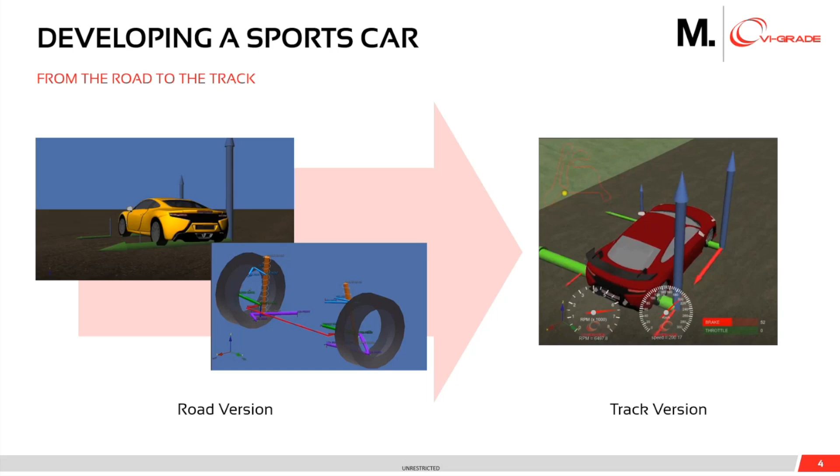In this webinar, we're going to be covering more the methodology and mentality behind this development. If you're looking for more specific details on how to use and operate VI-CarRealTime, we're also developing a video series together with VI Grade with that purpose. If you go on YouTube, you can very easily find that if you type VI Grade tutorials, or once again, you can find that information in our QR code. I think you'll really enjoy learning how to operate and use the software.

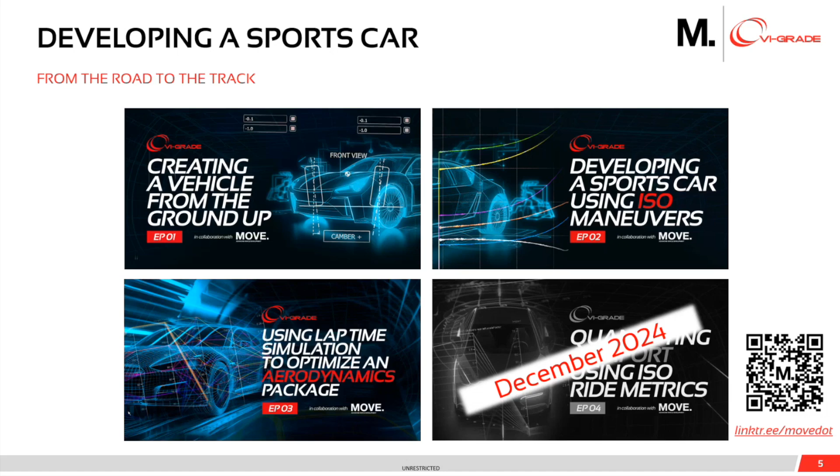All right, so a few quick words about the traditional development that we do not want to use, followed by a comparison with the digital twin-based development. In the traditional development, we would have the baseline vehicle that is our reference. We would define new targets for this vehicle, and then we would start prototyping new components to try and achieve our intended goals. The problem is we're going to have to prototype these parts, or actually do the tooling to manufacture these parts, then fabricate these components, go to the track, and then test it.

The problem is when we get to the track, we'll not achieve what we wanted. Maybe we needed more mass reduction. Maybe we needed more power. Maybe we needed a different damping setting, aerodynamics package, and so on. So proving ground testing, even though it is important at the end of the process, is very time consuming and very expensive.

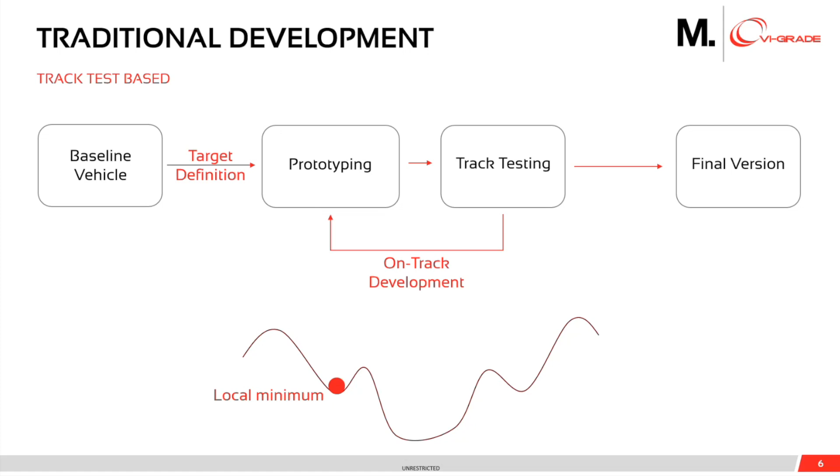Not only that, since we have a limited number of iterations that we can do when we're doing track testing and component prototyping, we risk getting only to a local minimum of our solution. So we risk not achieving all of the goals that that specific platform was capable of achieving. So it is limiting us.

And this is a very interesting plot that you might be familiar with. If you're not, I recommend that you take a look. There is a very interesting paper regarding this from Mandar Hazare, called An Integrated Systems Engineering Methodology for Design of Vehicle Handling Dynamics, in which we're going to analyze the different phases of the project, so concept definition, design, prototype, and then testing.

And we're going to see that if our approach is purely empirical and development on the track, project maturity takes a long time to come up. Why? Because when you are designing something, if you pass quickly through that and you don't do any proper work in the virtual environment using digital twins, you only know if you're getting to the final specification of your vehicle when you're really testing it. So it takes a long time until you get to the track testing and development to increase your project maturity.

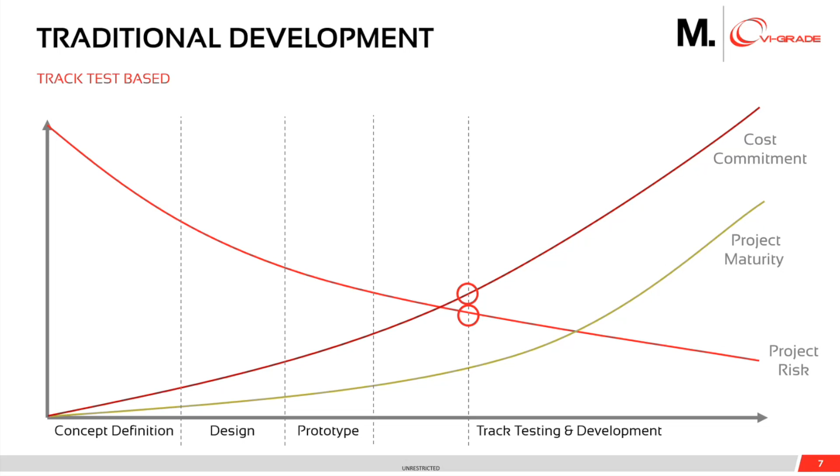On the other hand, cost commitment is very high because from the beginning, you're already testing things on track, having to do a bunch of tooling, having to manufacture many different prototypes. And actually, one of the biggest downsides is that the project risk is still very high while you already have a lot of cost commitment. So you already invest a lot of money into the project, but the project risk didn't decrease. You are still at the risk of the project failing, or not achieving your metrics, or the customer not being satisfied, or having to recall your vehicles that are on the road.

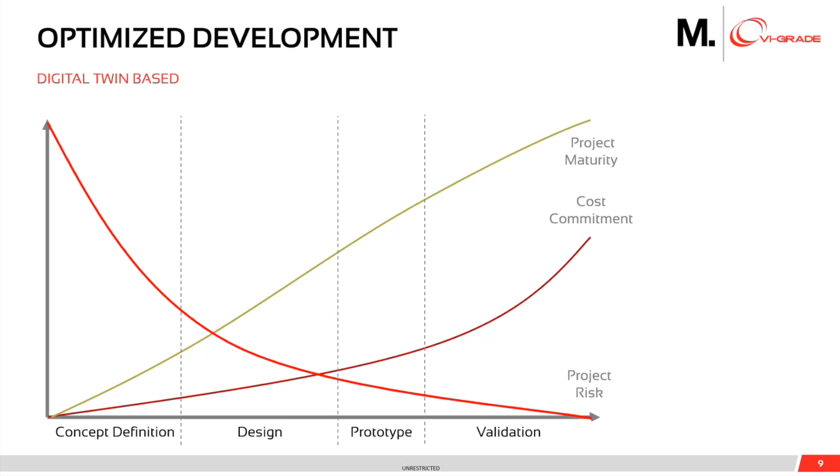So as we're doing proper work with digital twins, we get closer to the final project. We know that we're meeting most of our criteria. And then on top of that, if we also use driver-in-the-loop simulators, hardware-in-the-loop simulators, once again, the project risk is coming down a lot sooner. So we have a lot less money invested, but we already have a lot less risk as well, which is something very good for us as an OEM.

All right, so what will be the roadmap of our development together? We are working with a baseline or reference vehicle, and we're going to define new targets or new vehicle attributes, meaning the final behavior of the vehicle. Something that we have to keep in mind is that even though here we are speaking about creating a track-focused version out of a sports car, the methodology and all of our discussion is also useful and valid for many other examples, because very often we don't start from scratch, we start from a reference. Ideally an internal reference, or many times benchmarks that we perform, but we have that reference.

And then we are going to define new vehicle targets for our next iteration of the vehicle. And we're going to discuss defining these vehicle attribute targets. So once we have that, we're going to start with our offline virtual development, meaning we're going to be running simulations on our computer, and we're going to be using VI-CarRealTime for that.

After that, the next step would be for us to incorporate the feedback of a human being, meaning driver in the loop simulator, and also the effect of the real hardware, because we're not always capable of modeling all of the details of the hardware. So we also utilize hardware in the loop simulators, or the integrating simulators with hardware. Before then, we go to track validation and fine-tuning of the vehicle.

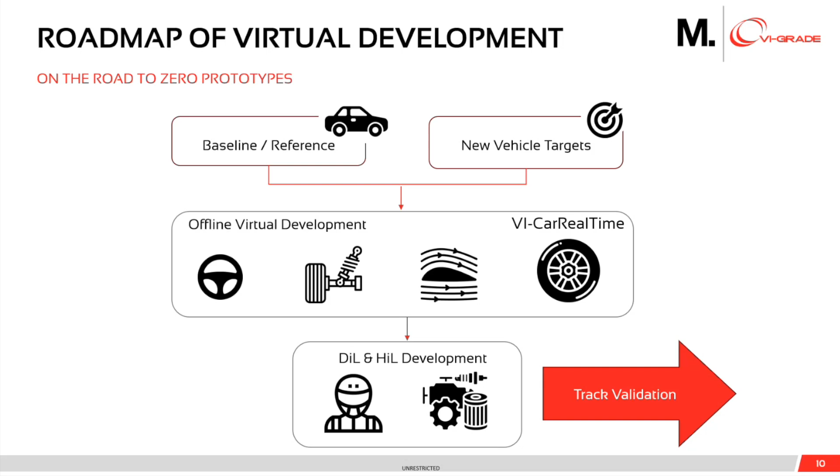So here, our case study, we're tackling the offline virtual development with a focus on VI-CarRealTime and showing you how the software can speed up your development. All right, so what is VI-CarRealTime? For those who are not familiar with the software, I don't like to call it a vehicle dynamics simulation software and so on. I like to call it a vehicle model environment.

Why environment? Because if you look on the right side of the image, we can do vehicle dynamics, so we can simulate all of the mechanical platform of that vehicle, which is obviously very important. But not only that, we can integrate control systems. And we know that nowadays, cars are as defined by the control systems and software as they are by the mechanical components. But even though it integrates all of these different areas, it is straightforward to model a vehicle because we use a curve-based parameterization.

So many times we don't have to have all of the details of the vehicle if we're able to measure the overall behavior of that car. For example, if we measure the suspension curves, we can directly input those suspension curves inside of the model, and we have already our suspension model. So it's very powerful to be able to work like that for fast digital prototyping.

Well, now when we look at the left side, this is also very important and explains why I like to call it a vehicle model environment. It is because it can very easily connect with driver in the loop, with hardware in the loop, with traffic simulation. If we use VI WorldSim, it provides us a very realistic scenario with other cars, other players in our environment. And with all of that environment, we start also looking at control systems, ADAS, driver feedback, interaction with other vehicles. So as we can see, it's a lot more than vehicle dynamics, even though we're going to be focused on vehicle dynamics in this particular webinar.

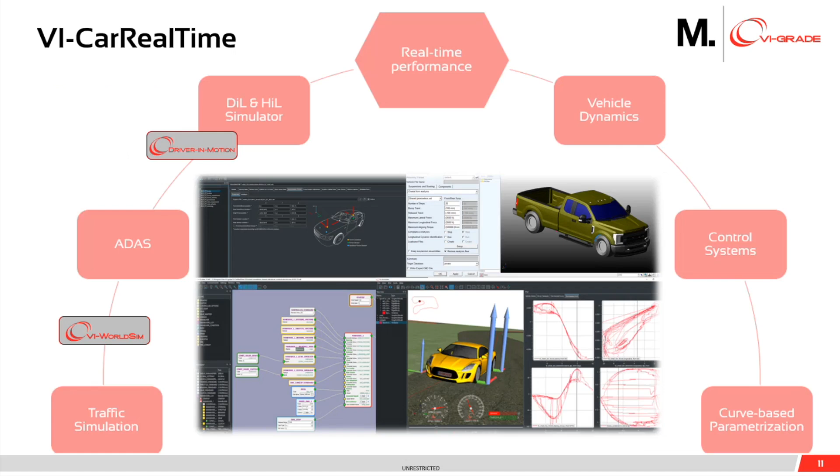All right, so now that we have the software defined, we're going to start defining the targets for our new vehicle. So where are these targets coming from? Well, one big source of information for us to define our targets is benchmarking. So we're going to be testing a bunch of vehicles in very specific and rigorous testing, because then we can collect what other people are doing, what compromises they are able to do, compare with our vehicles, and define future directions that we want to follow.

And of course, we're going to also be looking at the DNA of our brand, because basically defining the target is defining the DNA that we want for our vehicle, defining the personality of the vehicle that we're creating. So we also look internally and then compare it to the outside. Besides that, we're going to be looking at the voice of the customer, as we call it. So it doesn't only matter what we feel and what our test drivers feel. We're also going to be analyzing our customers, what they feel, what they want, and how we can connect what they say versus our objective vehicle attributes.

We can use simulations to understand all of the range, all of the performance envelope of our vehicles and digital twins. And one of the most important parts is not only collecting the data, but having a centralized database where we can put all of this information together and we can find relationships with them. So this is extremely important.

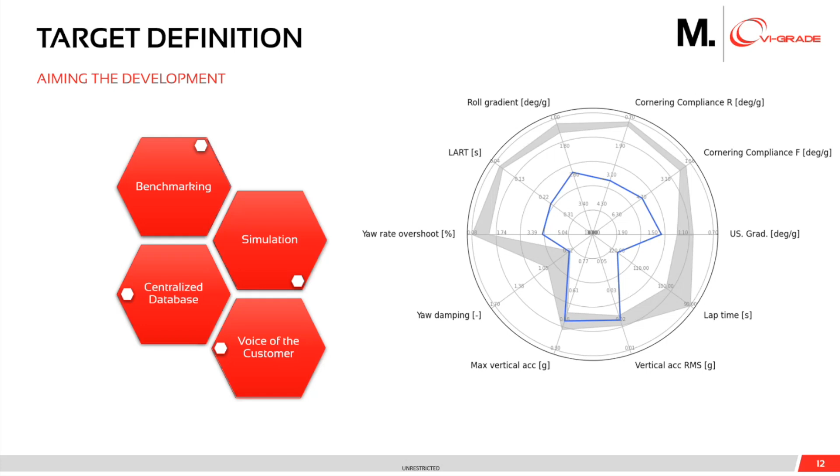So if you have a very rudimentary and not mature software solution and team, you should start with few metrics. Otherwise, once you have the maturity and the experience, you can start tackling more of these vehicle attributes so that you ensure that you always get to the fundamental ones, but in the correct way, in the way that you want them. So in this case, we are using VI-CarRealTime, and it's going to allow us to create hundreds of targets if we want. For this webinar, we selected maybe a dozen metrics. These are in the areas of steady state handling, transient handling, ride and comfort, as well as track performance.

So for this race car, even though we are trying to achieve a minimum lap time or a given lap time at a racetrack, it will be road legal, meaning that we still need to have the handling characteristics, the steering feel, the safety, the stability that a conventional sports car would have. So this is why it is important that we look at all of these metrics. However, when we are designing a real vehicle, not in a case study, we're also going to have a bunch of other attributes such as traction and braking performance, stability, energy management, particularly in hybrid and electric vehicles, torque vectoring, ADAS systems, and so on. So we're going to define a bunch of metrics, and VI-CarRealTime is helping us to define all of them.

So when we are working with simulation, not only can we work with many different metrics and targets that would be very hard to do in real life, to quantify all of that, to be consistent, and to have the time to do all of that testing. Not only that, it allows us to get more understanding. You're going to see that it is something that I will emphasize a lot in this presentation. It is not only the final result, but understanding what is going on. We don't want to press a button, optimize a system, and just have the final value, because number one, it will not be perfect, and number two, we're not going to understand why we have that. What we want instead is an understanding. We want to understand the connection and relationship between all of these different areas. I'll give you a few concrete examples in a few slides.

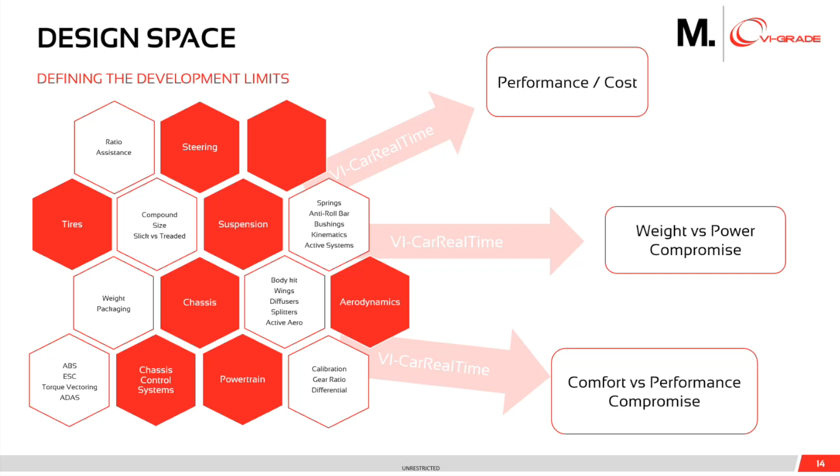All right, so we selected the components that we want to change. In this particular project, we found out that we are gonna have to develop a tire together with a tire manufacturer, which is something that we at MOVEdot do with our customers, and we interface the OEM with the tire manufacturer. We are going to change the vehicle mass, the power. We're going to develop new aerodynamics, so the bodywork will be completely different. We need to redo all of the CFD and aerodynamics work, and a few suspension components as well. So this is how we were able to minimize the cost for the performance we're going to get.

All right. So we are almost ready to start running simulations. Before that, we just need to make sure that we have our proper validated model, or ideally a digital twin. We know that to validate a system, ideally, we should start validating each of the components if we can. For example, tires, dampers, powertrain, and so on, before moving on to validating an entire system, for example, the entire suspension, where we could be using a K&C test, a K&C rig. Only then we go ahead and we validate the entire vehicle.

This is ideal because when we validate the final vehicle, of course, we're going to have discrepancies between the model and reality. But if we validated and tested each of the components, we can understand where this difference is coming from. So we can very quickly adjust our model to fix that. So it's a very good way to do that.

Not only that, it is very important to mention that the digital twin part should be taking place as a routine task. It is not something like, okay, we want to start a new project, so let's build our first digital twin before we can do that. Because whenever you have to tackle a project and you need to implement a new process on top of that, we know that it will not be efficient. Basically, you are creating two projects instead of just one.

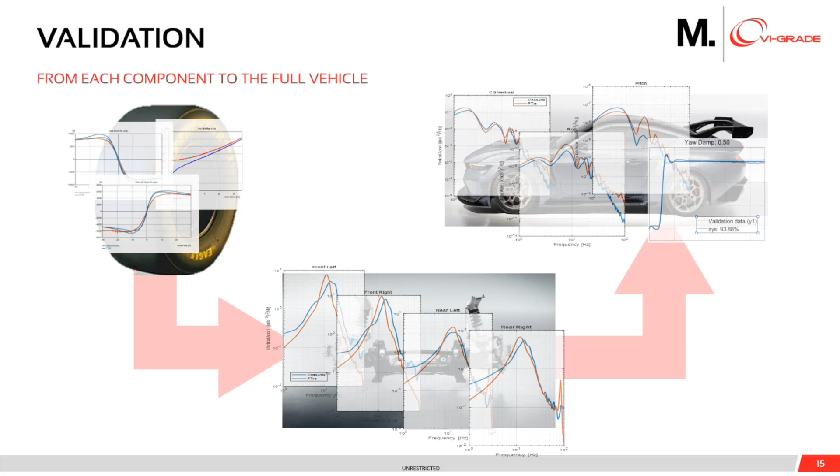We know that not everybody can instrument and test a bunch of different vehicles and take the time and the energy to create digital twins. So something very interesting is that VI-Grade did this together with IDIADA, where they provide digital twins ready to be used. If you scan this QR code, look on Google or use this link, you can see what fully validated digital twins they have available within VI-CarRealTime. So it is even easier when you already have a validated car that you can use as a benchmark or for any other analysis. So this, once again, increases efficiency.

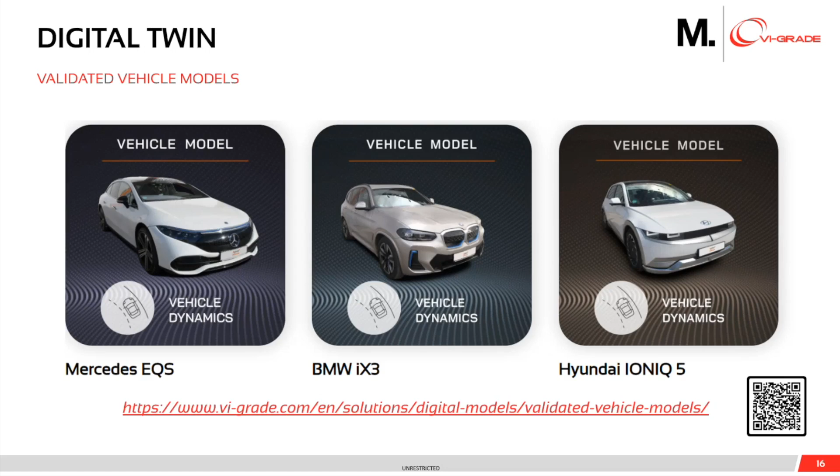All right, so let's say that we have our digital twin. Now we have to define what maneuvers we're going to be running.

It is extremely important that whatever maneuvers we are running in the digital environment, we are replicating the maneuvers that we do in the real world. Why is that so important? Basically because we want all of the results from these two sources to go through the same pipeline of data processing. So this is, once again, something that we very much focused on at MOVEdot, helping our customers come up with a streamlined and very efficient workflow of data processing.

So in this case, we want both our virtual test and real test to output similar data, to go through the exact same processing scripts, get the exact same metrics and sanity checks to validate the maneuvers. And then this helps us to get to actionable conclusions in a way that is a lot more straightforward.

Not only that, you can already see how this helps us get to that vision of having a vehicle development together with a digital twin development. Because whatever tasks we're doing with the real vehicle, we can quickly compare that with our digital version of it. So that's extremely important. I'm gonna highlight a few ways in which we can do that. In any case, we are now going to start tackling the simulations.

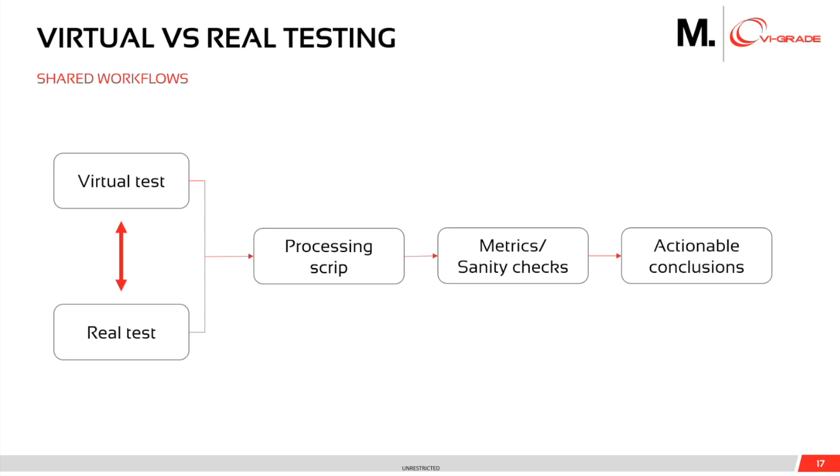So the first area that we wanted to discuss, as I mentioned, is handling, and we're going to be doing steady state first. So let's start simple. We're going to be running a typical maneuver, usually used from the ISO norm, which is a constant radius maneuver. In this case, because of space constraints in real life, we're going to be replicating the same maneuver in the simulation using the available space, in which we have a constant radius and we're slowly increasing the speed.

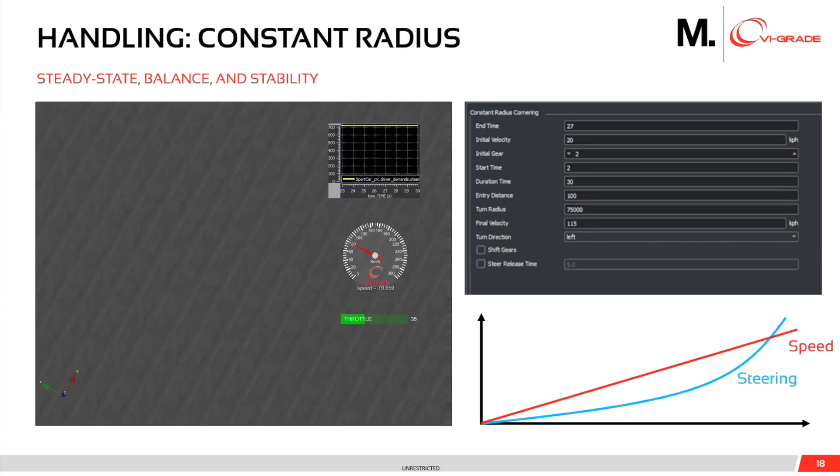Well, not that slowly, otherwise in real life we're going to be overheating our tires. So we replicate that in the digital world, and then we will be looking at how much the steering is increasing, or our side slip angle, our slip angles, roll angle, so we can extract a lot of metrics. The interesting part of doing this with VI-CarRealTime is that I don't have to set up that simulation. It is already parameterized for me. I just have to set a couple different numbers of what are the speeds, the radius, and so on, and then I'm ready to go. So it's very quick from the get-go to get these simulations running.

So the next step for us is to look at the results. In VI-CarRealTime, we already have an analysis environment, VI Animator, where we can see the plots and we can see the real vehicle, which helps a lot for troubleshooting and understanding the simulation results. But not only that, as you probably noticed, I like automations. I like automated processes. So the interesting thing is that VI-CarRealTime already provides me with an auto-generated report. As soon as I'm done with the simulation, I have this report generated automatically.

And the most interesting part is that the script for this report is available. So I can just modify it to do whatever I want: include new metrics, include new plots, and provide the plots that I want to analyze. So once again, emphasizing the need for automation. And with that, we were able to conduct our steady state vehicle dynamics analysis, going from the red curve all the way up to the targets that we define. As you can notice, the wider you go, the more similar to a race car or to a track-focused car we are in the way that we organize this radar plot.

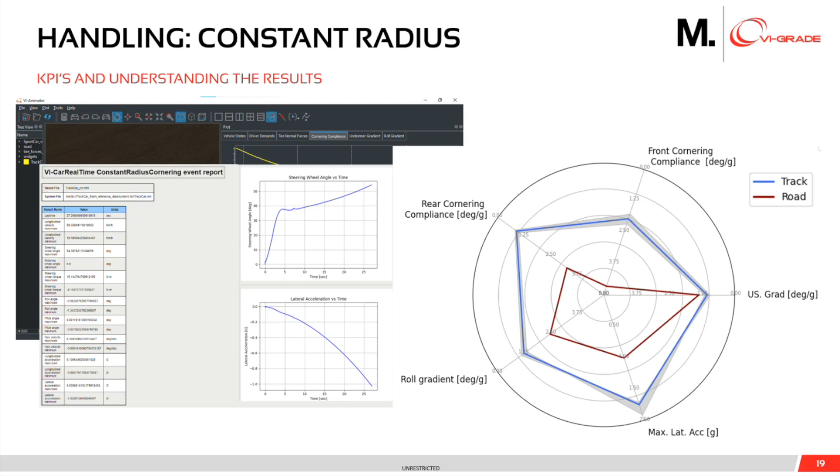So obviously, it's not as straightforward as you run one simulation and you're already achieving all of your targets. There are multiple sub-experiments that we're going to be doing, trying to understand the influence of each of the parameters and understanding what parameters we want to change. Always focused on gaining understanding of our system. And I'll give you some examples in the next slides.

Okay, so we were speaking about automation. Before we move on to the next maneuver, I would like to show you some other ways in which we can integrate Python within VI-CarRealTime. Whenever we're running simulations, let's say that there is an extra output that is not provided by the software. Let's say that I do vehicle dynamics and I look at cornering compliance of each axle, which is, by the way, a very useful metric, but I define it in a particular way, which is different from the way that VI-CarRealTime defines it. I can create a Python script for that, integrate it within the software, and then it's going to provide me with the results inside the software.

So I don't have to necessarily do post-processing totally outside the software. I can have that integrated. Not only that, but also, when I'm doing experimentations using investigation mode, which we'll talk about, I'm also able to create custom metrics with whatever processing methodologies I want using Python.

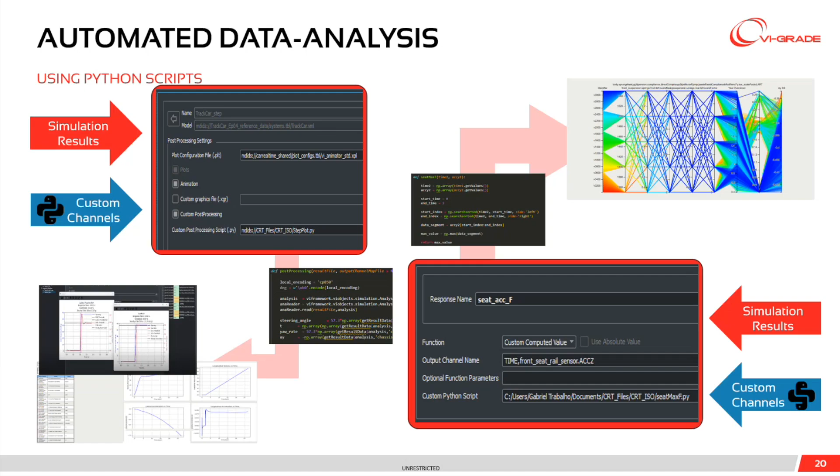All right, so we're going to be using that, and we will speak about the next maneuver. So once again, a predefined maneuver within CarRealTime, which is giving us the transient characteristics of the car. So this is a step steer. We are driving in a straight line, constant speed, and then we have a very aggressive steering input, as you can see. Since it's already parameterized, I just have to populate it with a couple of parameters that I want, and it will perform the maneuver for me.

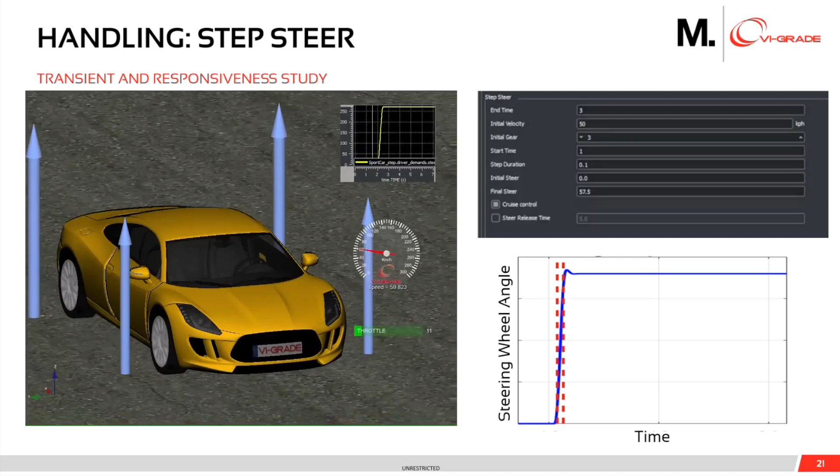Once again, I will then look at the results within the software, verify that everything was okay, have my custom plots and custom reports automatically generated, and with that, I can calculate, once again, automatically all of my metrics. What you can notice here is that this time, since now we're starting to look at transient, I was not able to achieve all of the metrics on the first shot.

And this is normal. We're not here to be perfect. We're here to do things efficiently and to gain understanding. So I don't want to spend months just running iterations to get this first maneuver right. The way I like to do it is to do one complete cycle of all of the different maneuvers that I'll have to optimize to gain understanding about my system,

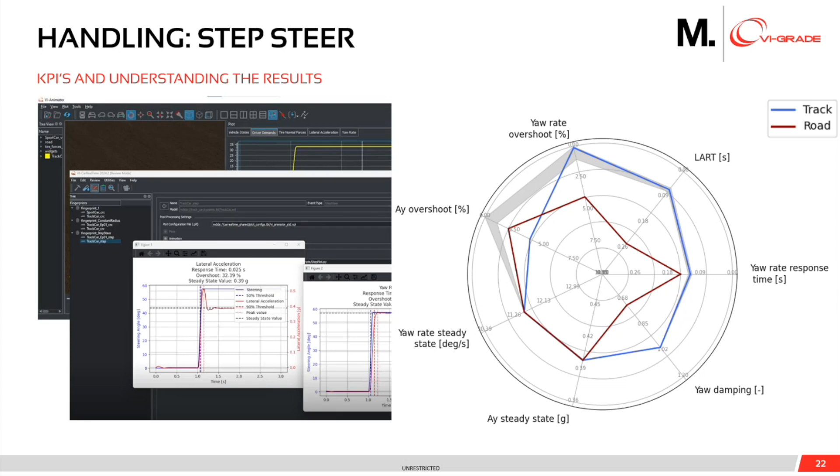to get a general understanding of in what direction each vehicle attribute is trying to pull each of my components, in what direction it is trying to say that the spring should go, that the bushings should go, that the dampers or the active systems or ADAS should go. So I'm going to do one full cycle, and then I come back to fine tune and refine and understand the trade-offs.

All right, so before we move on to the next maneuver, there's something very, very important that I want to talk about. When we speak about digital twins, usually we are speaking about just the vehicle, the mechanical platform, but we have to understand that there is a lot more than just the mechanical platform. We need to make sure that we have digital twins, not only of the mechanical aspects, but also control systems and software environments within the car. So we need to have a validated model for all of the different systems.

And we can go even further. We could say that we also need digital twins of the outside environment, because otherwise how are you going to develop your systems using offline simulation or simulators if you don't have validated models of the outside world as well? So in that sense, sensors are particularly important because you need to create sensors within the digital world that will have a similar performance or behavior to the real world. So digital matching real world.

So in that sense, in order to have a similar maneuver in the virtual world and the real world, you need to have the sensors placed in the same positions. So in this example, the next maneuver will be ride maneuvers. We know that to develop ride, we're placing specific accelerometers in specific places of the vehicle. So here, in this example, we want to analyze comfort on the passenger's or on the driver's seat. So we are installing an accelerometer at the seat rail, not only on the real car, but also in simulation.

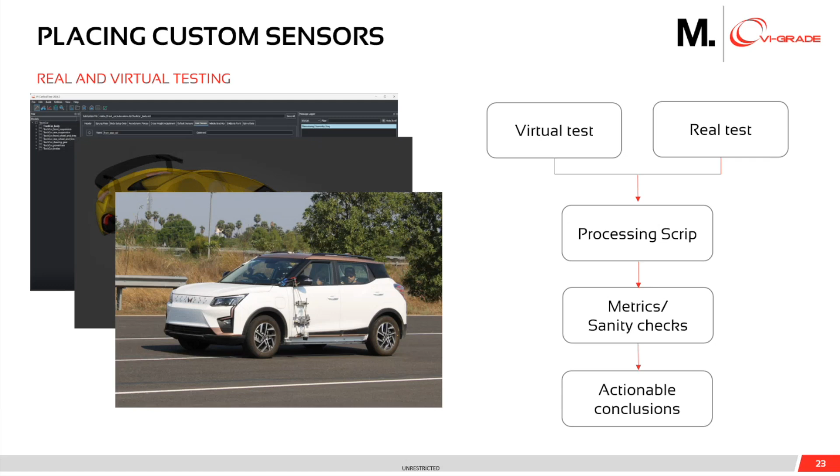And VI-CarRealTime allows us to do that, to install whatever sensors we want, to replicate the vehicle and connect them to whatever bodies we consider relevant. So with all of those accelerometers installed also in the simulation, so that we can look at the channels and later on validate against our real car, we will perform ride maneuvers. So the first maneuver will be speed curbs.

With speed curbs, we're going to be looking at maximum values of acceleration when we have the impacts on each of the axles. Well, luckily in this vehicle, we have only the front seats. We don't have a back seat to also analyze and decide the trade-offs, but it is something that we could easily do here. So here we look at maximum values of acceleration and maximum values of body motion, as well as the dissipation of this energy, such as pitch damping, for example.

Once again, VI-CarRealTime will provide us with parameterized ways of defining that. So I have a constant speed maneuver, but I can change the road profile to whatever I want. And when I change the road profile, it is providing me with a very simple way of defining the radius of this speed bump.

It is important to know that when we are doing ride analysis and NVH analysis, we need higher accuracy tire models. So Pacejka models will not be enough to have proper data for that type of analysis. But VI-grade provides straight away a connection with CDTire, FTire, TameTire, MF-Tyre from Siemens, and also MegaRide's model, which is the 3D ride. So it's very easy for me to plug whatever tire models I work with to do ride or NVH.

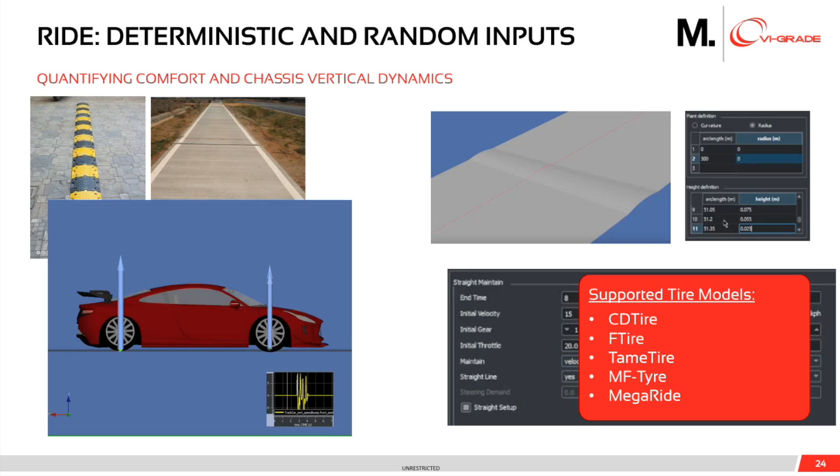So for ride, besides only looking at the impact, we also look at another maneuver, which is very, very simple to model or to have running inside VI-CarRealTime, which is random inputs. So random inputs, we are basically simulating a rough road with a lot of bumps. And in that case, I can input and define the road profile based on PSD parameters.

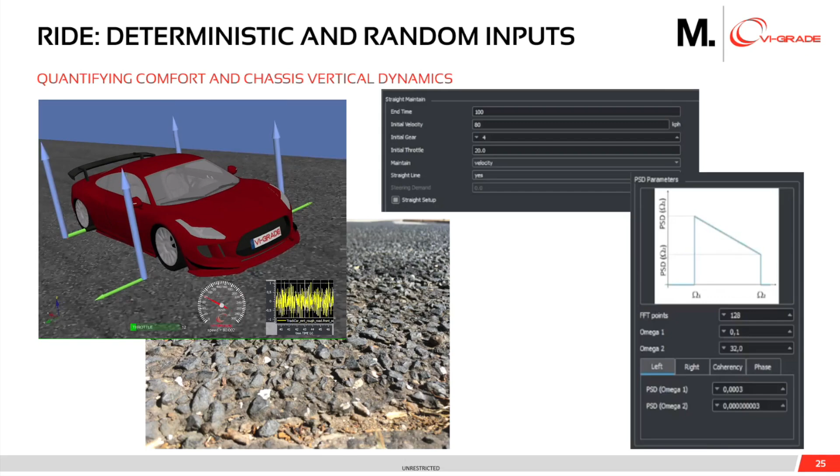As you guys know, PSDs are giving us the power dissipated or the power provided in each different frequency of the signal. So I can measure this PSD from the real car to get an idea of the track profile, and I can use similar parameters on the simulation. Once again, it is very important that we have the same environment for the simulation as we have for real testing. All right, so I have these two simulations running.

So we're going to use our Python scripts and automations once again to calculate all of the metrics. Here, we were able to achieve some of our metrics. We lost in other places, but once again, I don't want to overly worry about this now because I'm still in the process of gaining an understanding. But you can start seeing how many trade-offs we're going to have to make, even though we are only looking at 4 different attribute types.

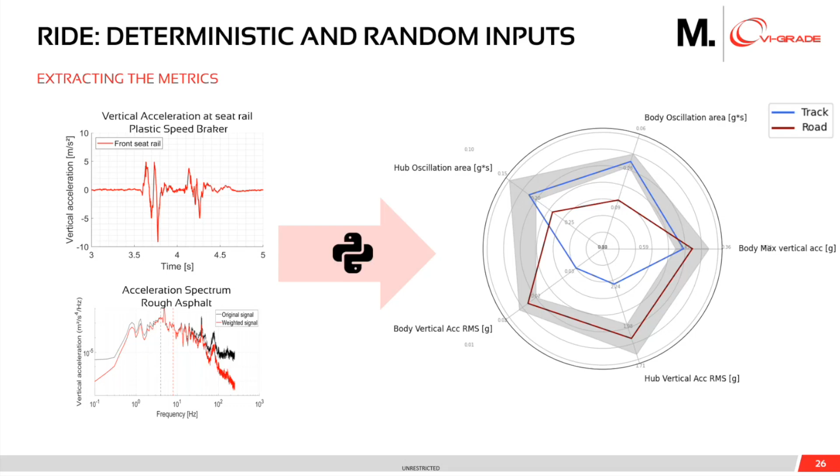So the last analysis that we run before we can close the cycle and show the conclusion of the project and how to put everything together is the track performance, because in the end, not only do we want the car to provide a given feeling to the driver, we have a very clear target. We need to beat a lap record at the Barcelona circuit. So we'll be doing track testing and track evaluation also in the digital world with lap time simulation.

So we will use this opportunity to install and to optimize our aerodynamics package. So as I said, we developed a new aerodynamics package, and we can now use this opportunity to optimize it. So for those of you familiar with race cars, we know that when we install an aerodynamics package providing a lot of downforce and performance focused, we will have what we call aero maps.

What are aero maps? Aero maps are defining how much downforce, how much drag, and how much downforce distribution, or the balance of aerodynamics, versus the ride heights. So the height of the front axle and the height of the rear axle. So in a race car, when you change the heights of the axles, not only do you change kinematic properties as you would in a passenger car, you change a lot the aerodynamic performance.

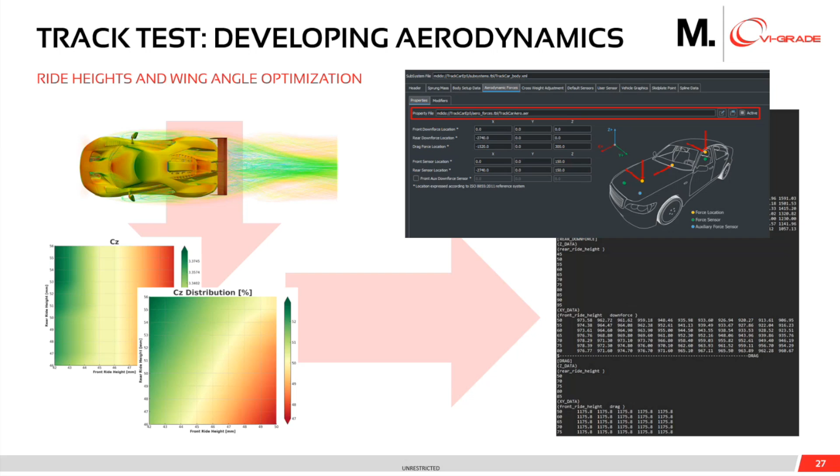So we're going to be using VI-CarRealTime to optimize that performance. It is very important that not only are we focused on creating new components, but whatever components we have, we make sure that we optimize them. So we're going to input the aerodynamics parameters within the software using these tables.

Next, we need to model the track. So for that, there are different ways in which you could model a track or a circuit within VI-CarRealTime. Here, in this simple example, we use Google Earth to extract the path of the track using KML or KMZ files. And then we have VI-Road, another module that allows us to create the race tracks.

Besides creating the racetrack itself, we can also define the road roughness if we want, which is very interesting and very useful. So if we have a laser scan of a circuit, which is the ideal scenario, we can also use VI-CarRealTime. So as you can see, if I have not a lot of resources, I can do the analysis I want. And if I have a lot of resources, I can count on the same technology for that as well.

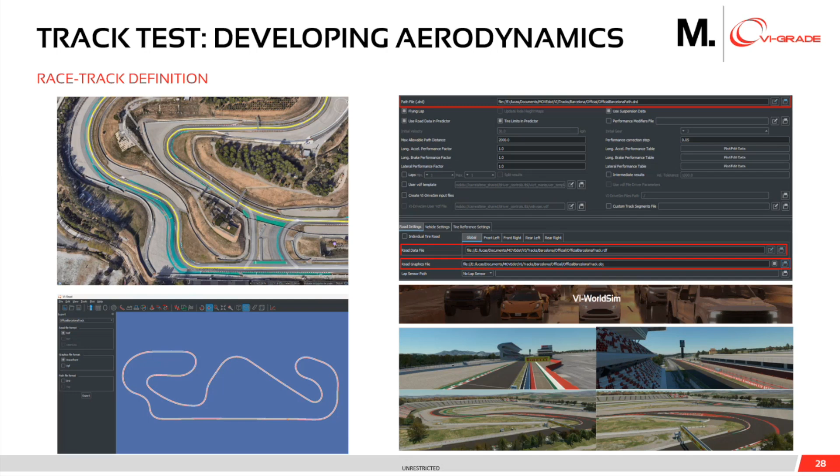And besides that, VI-WorldSim, which is the package that I mentioned, the solution that provides a realistic representation of the real world, is also providing many racetracks. Besides proving grounds, scenarios and cities, it's also providing racetracks. So if you search for that on Google, you could find them, and even the Barcelona circuit, as you can see in the pictures, is also available.

All right, so we defined the vehicle by changing the aerodynamics package. We defined the racetrack. Now we need to define the experimentation that we're going to do. If you remember from the first maneuver, I said that I'm not just randomly playing with parameters or in one shot finding the results. I'm running multiple experiments. How do I run experiments with VI-CarRealTime? I use what we call investigation mode.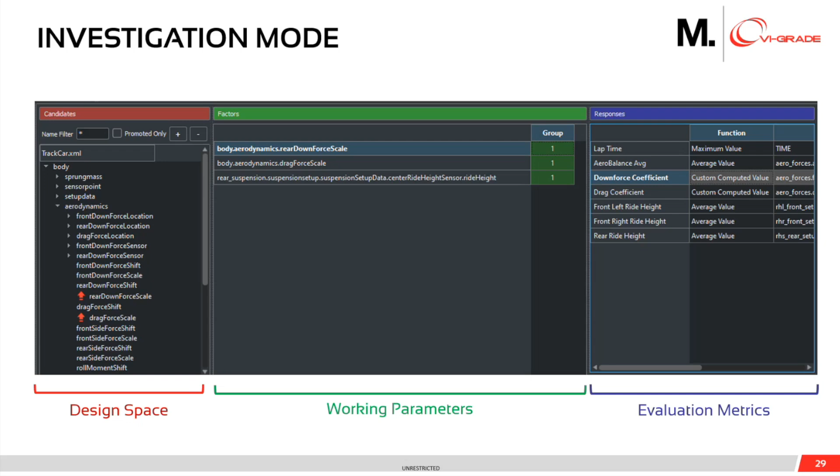So in investigation mode, we have all of the design space of the vehicle, basically all of the components that you have on the vehicle. Then we have the parameters that you want to work with. So you're going to pre-select parameters that you want to change, and then you define evaluation metrics. So what CarRealTime will do is select a given combination of all of these parameters, where you can define what strategy you're going to use for these combinations, and then it's going to run thousands of simulations if you want to provide you with the results.

So this is another case study, another investigation or project that I was doing using VI-CarRealTime, where we were running 3,000 simulations. So we wanted a very comprehensive understanding of the influence of each parameter. So here on the left side, we have the working parameters. So we have a parallel coordinate plot with all of the values of the inputs and then the values of the outputs. And then I could use a similar study to optimize aerodynamics. That's what we're going to do now.

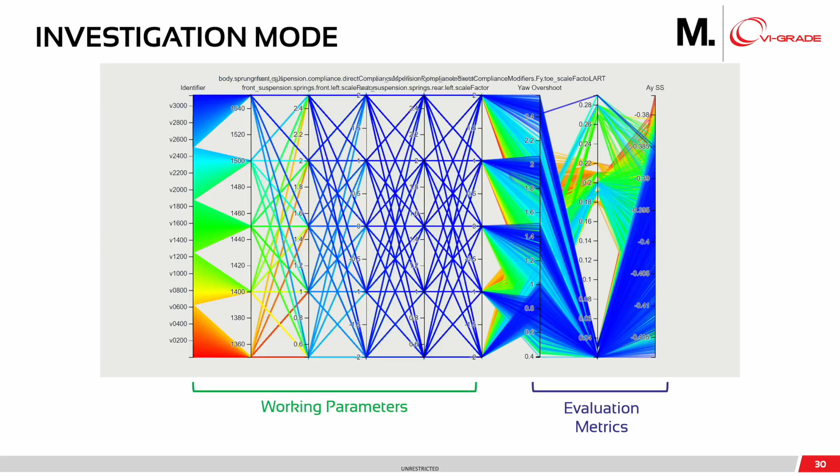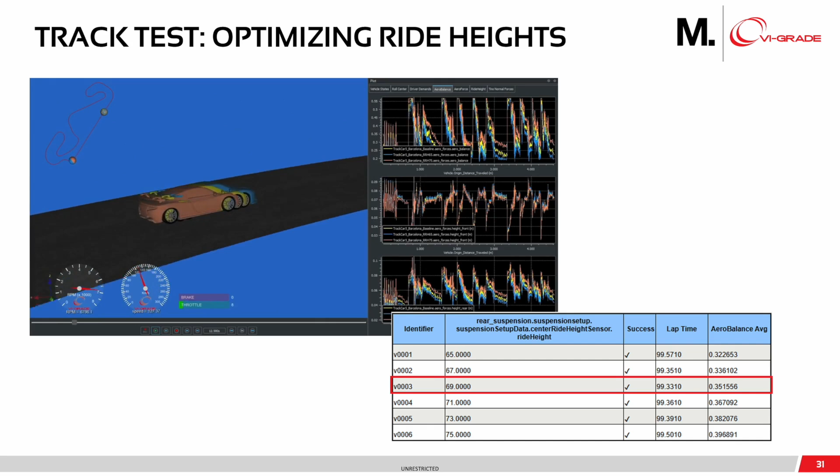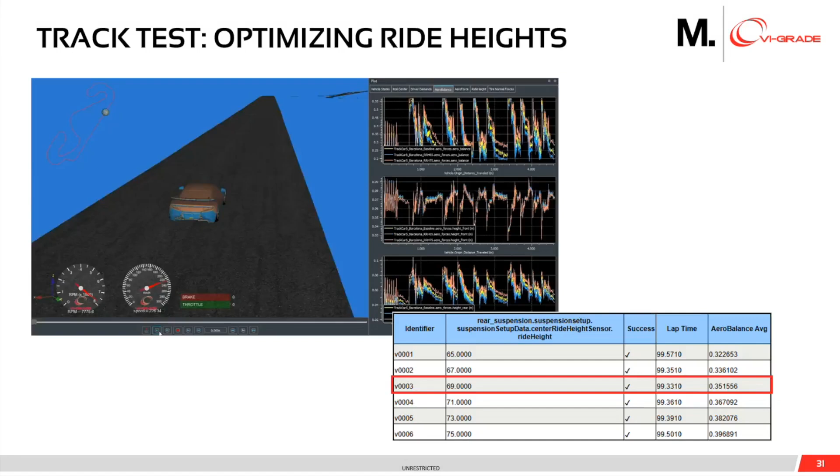So if you watch the video, we were able to find a specific ride height combination of front axle and rear axle that provides the fastest lap. So as you can see on the straight line, we have one vehicle being faster, but as you start to corner, you can see that there is actually an optimized solution. So we're going to be using the animator and the analysis plots to understand where each solution is faster. And then we're going to be able to select the optimum compromise and optimal position for the vehicle ride heights, making sure that we maximize the performance that we have on the vehicle.

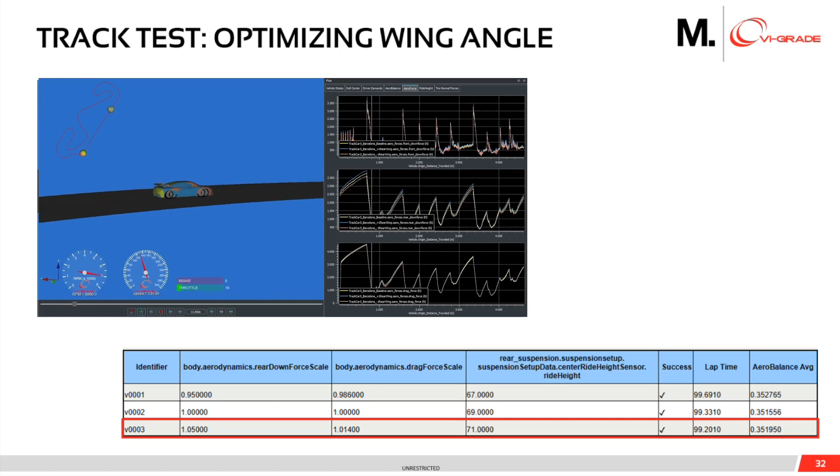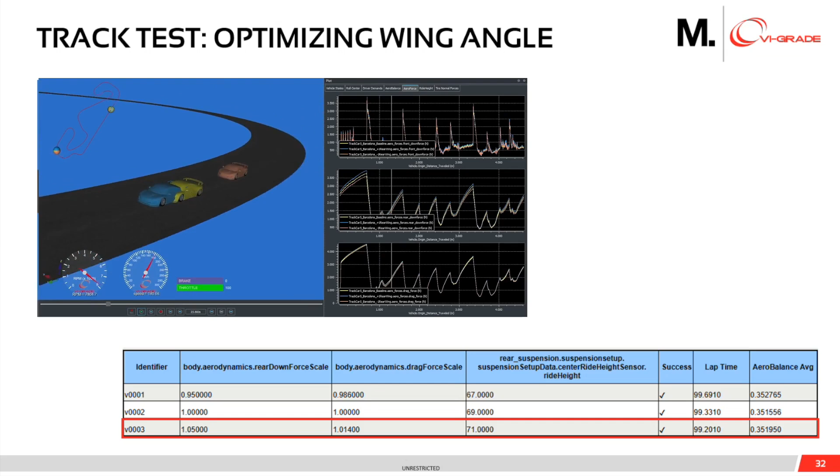Besides that, we could also optimize the wing angle. So once we gain an understanding of what's the aerodynamic balance that we want, the downforce split between front and rear axles, we could also optimize the wing angle for that given aero balance. So once again, doing an analysis using investigation mode showed us what was the fastest configuration.

So let me give you a snapshot of everything that was done so far so that I can show you how everything connects. So stay with me. First, we started analyzing handling. We did steady state and we did transient. We did one iteration of that. Then we did ride. So we analyzed rough road and we analyzed impact strips. Then we did track performance here at the bottom. So we closed the loop once.

But then what I want to do is, after I gained a general understanding of my problem, of what components I'll have to define trade-offs for, what vehicle targets are not possible to achieve at the same time, I can come back to each of them and run specific investigations or experimentations. So let me give you an example. When we're analyzing ride, for that vehicle, is it better if we get better ride coming from springs and dampers, or actually do I have to change bushing stiffness?

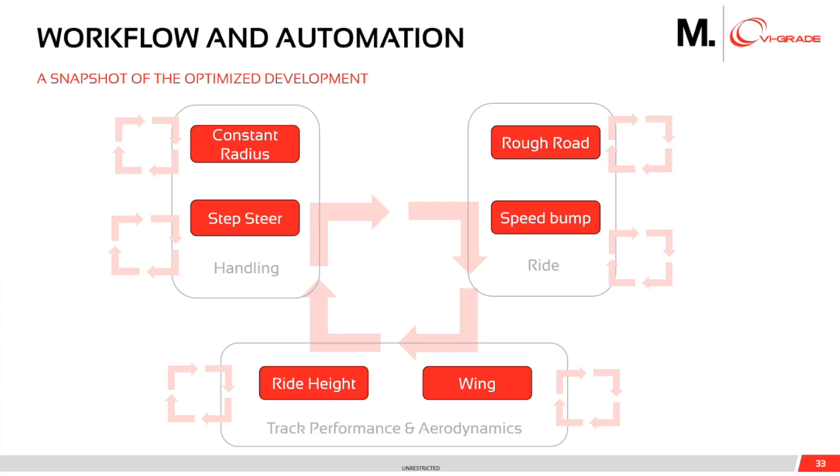Which solution is going to give me the best ride performance, but without compromising handling and track performance? So this is the type of sub-investigation that I'll be running. And then I'll be running these iterations and sub-investigations to optimize each aspect of my system, gaining understanding of it, and on top of that, achieving a global minima in the virtual world that, if done properly, when I put the real car on track, will not be far away.

After that, if we want to optimize this process even further, instead of doing all of this analysis manually, such as setting up the simulation, setting up the different aspects that I want to investigate, the different components, running the simulations, looking at the plots, processing the results, I can automate all of that with the API of VI-CarRealTime.

So the way that we prefer to work is we define a script where we define a DOE, a design of experiment that we want to run, meaning we map all of the vehicle configurations we want to test. Next, we have all of our simulations predefined and pre-configured so that we can run the simulations automatically for all of the different vehicle configurations that we decided. After that, we have the results plugged directly into processing scripts. And after that, we have the plotting and the reporting automatically done as well.

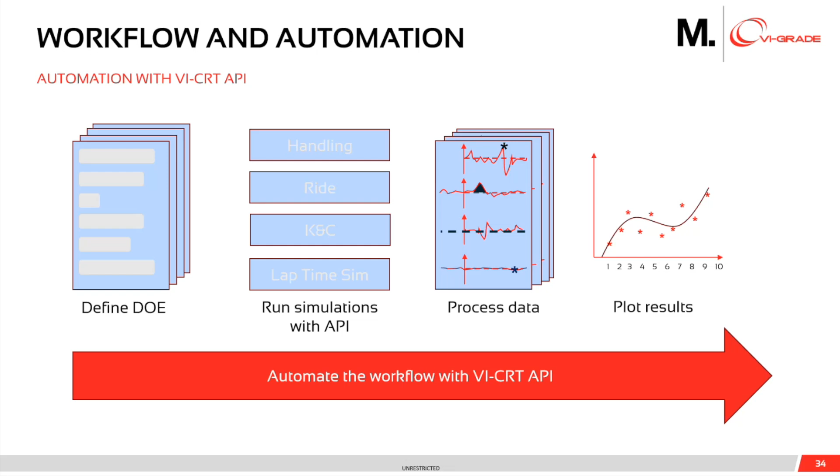So with literally the click of one button, you can run all of these different steps, speeding up and increasing the efficiency of your development. So you can do all of that through code in case you prefer to use the API. Not only that, if you want to connect VI-CarRealTime with control systems within Simulink, for example, you can also do that. So it's very good to have this environment that you can carry in whatever directions you need and fits best your workflows, which is very important for us when we are supporting our customers develop their own procedures.

And then, as a conclusion to our design, on the video, we can see that we designed a car that is a lot faster than the other, has a lot better performance. Not only is it faster at the track as we're seeing, but it achieves all of the targets that we defined after a few iterations, and ultimately it beats the lap record as we defined. So now we know what components needed to be changed. We know what components were the most efficient to achieve that performance while still meeting all of the other criteria that we wanted, and we are then ready to go to the next step.

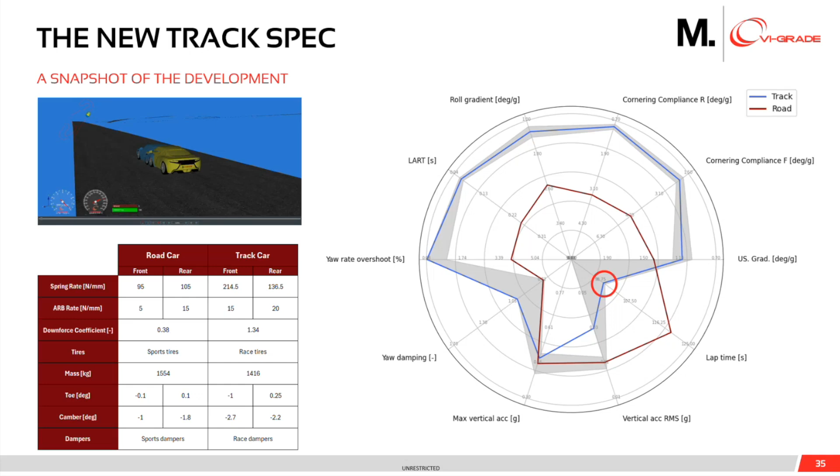We're not covering the next step here, but what would be the next ideal step? We would be integrating all of that into hardware in the loop and driver in the loop simulators. Why do that? As I said, we cannot always characterize everything from the hardware, so we can also experiment and develop the hardware connected to a simulator, and ultimately we need the driver feedback as well. So if we're able to do the driver in the loop and hardware in the loop development, also using simulators, when we get to the final vehicle at the track, we should be very close to a final solution.

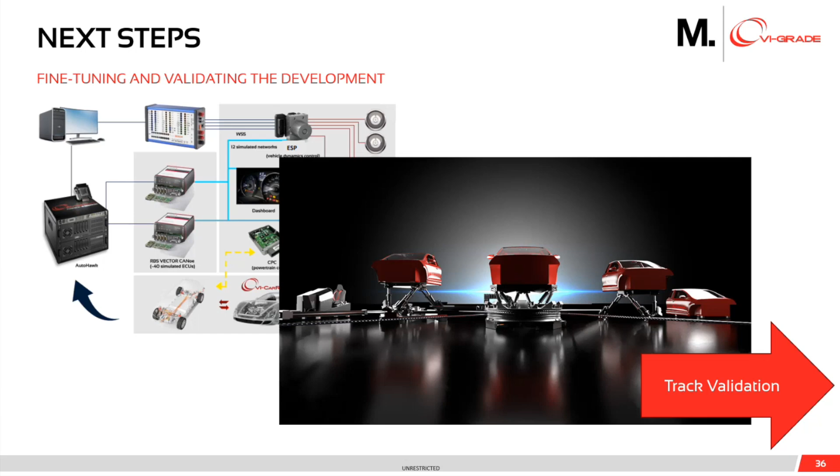So once again, minimizing test time, gaining project maturity a lot earlier on, decreasing the risk of the project earlier on, and then ultimately minimizing costs and developing vehicles faster. And as you know, our mission is to 10x vehicle development efficiency, so nothing more optimized than reducing the number of prototypes, as is the mission for VI-grade. So guys, this is what I had to show for you today.